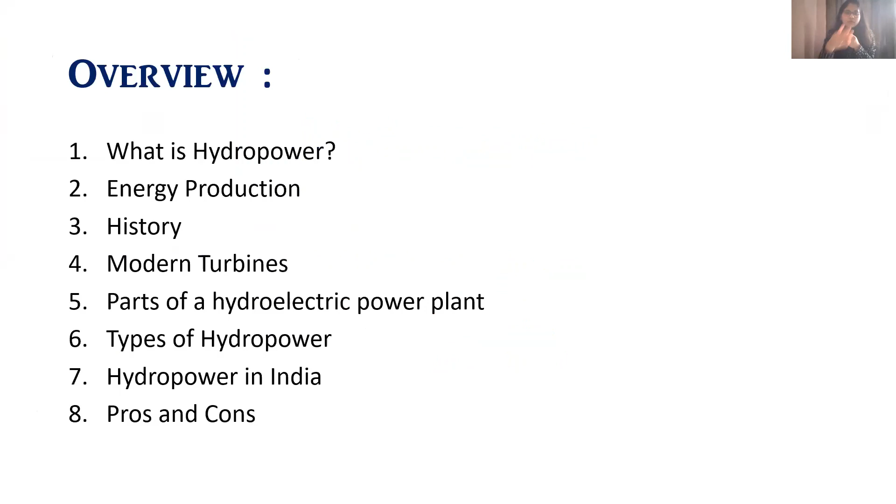One second. So this is an overview of my presentation. These are the various points that I'm going to be speaking on. Starting with what is hydropower. Hydropower is the power derived from the energy of water that falls from a height or that falls at a high speed. And this energy is harnessed for useful purposes.

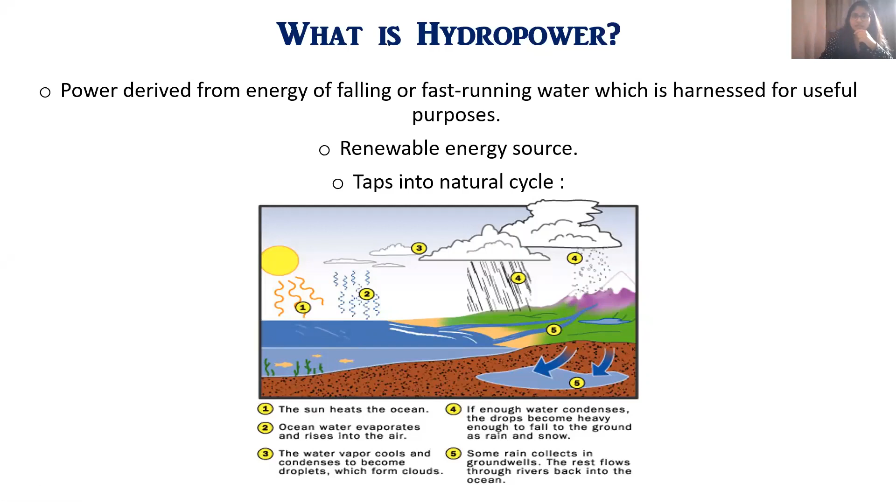So what we do in hydropower is we convert potential energy and kinetic energy of water into electrical energy. It is a renewable energy source because the water cycle is constantly renewed by the sun. The water cycle is as follows. So here we have the sunlight that's falling on the ocean. The water evaporates and the water vapor rises into the atmosphere. The water vapor here condenses and forms water droplets. The water droplets then form clouds, and when these clouds become heavy enough, the water returns back to the earth as rainfall.

So why do we need hydropower? We know that non-renewable energy resources, that is fossil fuels like natural gas, coal, etc., take millions of years to form. So naturally, the production rate is very less as compared to the rate at which we're consuming energy. We're constantly looking for renewable energy resources like hydropower, wind power, solar power. Also, burning of fossil fuels emits greenhouse gases. So hydropower has zero greenhouse gas emission.

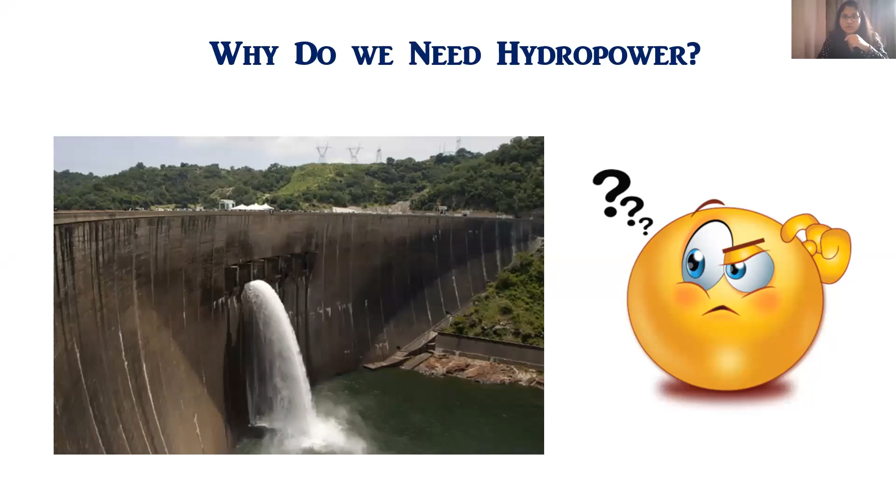In comparison with thermal power plants, hydropower plants start very quickly. Thermal power plants need 5 to 6 hours to start because we have to achieve boiler temperature and pressure. Whereas in hydropower, we just have to open the gates of the dam, allow the water to flow, which spins a turbine, which is connected to a generator, which generates electricity. Also, in comparison with wind and solar energy, which depend on weather conditions and time of the day respectively, hydropower depends only on water, which is always available. So these are the reasons why we want to improve this technology and use it further.

Let's start with the history of hydropower. So humans have been harnessing water energy for thousands of years. The first picture here is an irrigation system used in ancient Egypt. So this water lifting device was used to irrigate farming land. This was aimed to increase the area of farming land around the river Nile.

The second invention was a great invention by Archimedes called the Archimedes screw. So the Archimedes screw is encased in a hollow cylinder. A part of the screw is immersed in water, the lower portion of the screw, and this water is transported upwards by rotating this device about this axis. So this is a very useful device which was used to lift grains, it was used to clear flooded mines, and is also used for irrigation.

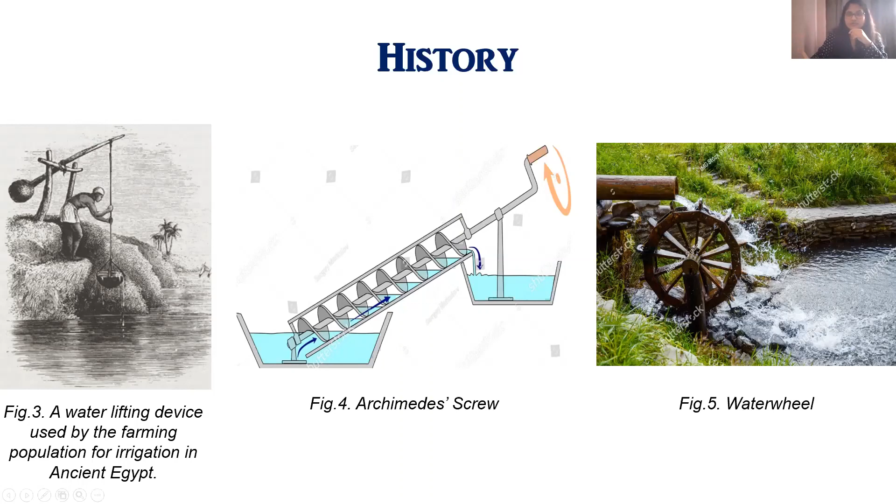Now coming to water wheels, the first people to use wheels were Greeks. They used water wheels to grind wheat into flour. Then by 1080, water wheels were used throughout Western Europe. So these are the different designs of water wheels that progressed with time. So this is the undershot wheel, the first type, in which water flows from under the wheel. This was very inefficient because the kinetic energy of water wasn't captured efficiently.

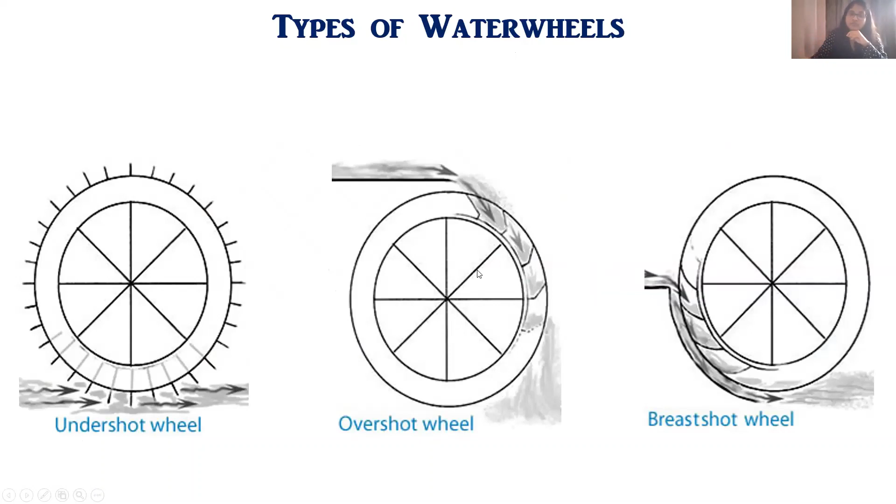With time, the designs improved and we got the overshot wheel and the breastshot wheel. So in both these wheels, we see that water is incident on the wheel from a height. And still, there were many more improvements made over the centuries to improve the efficiencies of water wheels. And finally, in 1832, the French engineer Fourneyron invented the Fourneyron turbine. So the Fourneyron turbine is a fully submerged vertical axis device. These blue things that you see here, these are the fixed vanes.

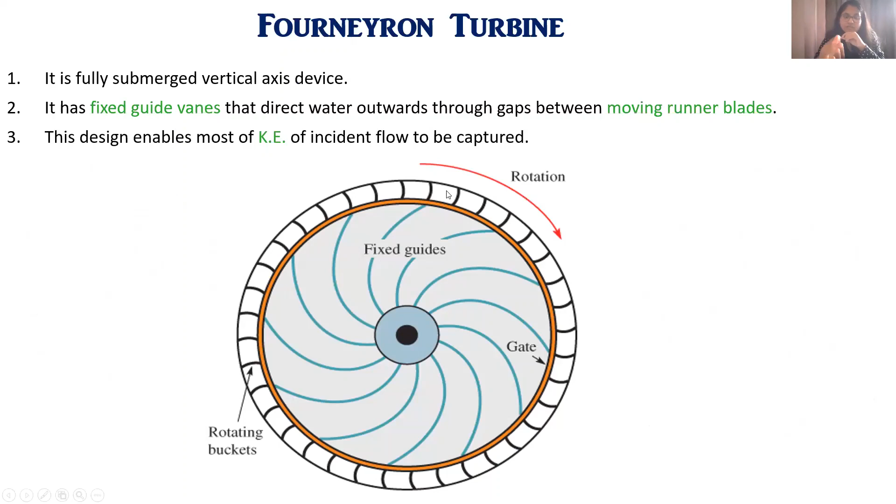These fixed vanes or guide vanes are stationary. So when water falls on the turbine, these vanes simply direct the water towards the runner blades. These white things are the runner blades or the rotating runners. So this design actually enables maximum kinetic energy of the water to be captured. So the Fourneyron turbine pioneered the development of modern water turbines.

The modern water turbines are basically of two designs, the impulse turbine and the reaction turbine. Impulse turbine uses the impulse force exerted by the water, and reaction turbine uses the reaction force exerted by the water. An example of impulse turbine is the Pelton wheel shown here. This Pelton wheel was invented by Lester Pelton in the 1870s.

So this type of water turbine is suitable when water energy is available at high head and low Q. Head is basically the vertical distance between the top of a reservoir and the turbine, and Q is the volume of water that flows per second. So let's see how this works.

So water is injected in this nozzle that you see here, and it is ejected at a very high speed. So we get a water jet, and this water jet is incident on these blades, which then rotate, like this. So with the blades, the shaft of the turbine also rotates. This shaft is then connected to a generator, which generates electricity.

So we see that the kinetic energy of the incident water is converted to the rotational energy of the blade. So basically the power output of the turbine is equal to the kinetic energy incident per second, and it is given by this formula here, half rho Q u squared, where u is the velocity of the water jet.

Okay, so the wheel has bucket shaped blades. Had the shape not been of a bucket, then the momentum of the water would not have been captured entirely. The water would have just been splashed in many directions. But this shape enables maximum momentum of the water jet to be captured, because the direction of the incident water jet and the direction of the water splashed are exactly opposite. So that is why the blades are shaped like this.

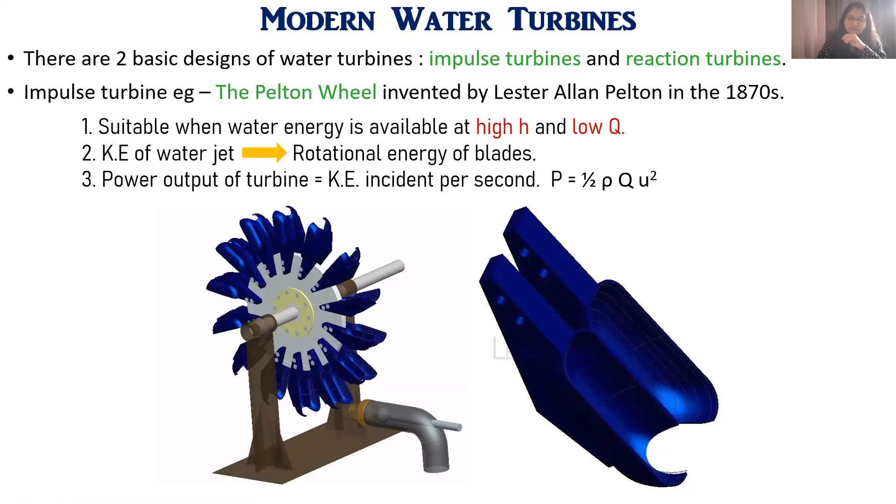Coming to the reaction turbines, there are two types of reaction turbines, Francis turbine and Kaplan turbine.

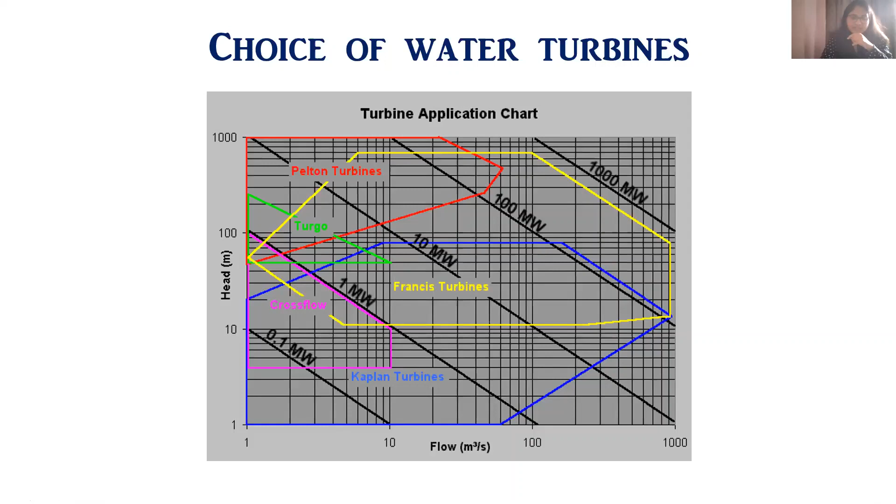Whereas the Kaplan turbine is used for low head and high Q, because when the water flow rate is high, that ensures an efficient production of reaction force. So it is used in this region. We see from this graph that the Francis turbine lies in the middle, that is medium H and medium Q, so it can be used for a wide range of applications. The only problem if we use a turbine outside its recommended operating condition is that it won't work efficiently. That's the only problem.

So, parts of a hydroelectric power plant. This is the basic layout. This is the reservoir, where water is stored. It's just a storage space, and the height of water in the reservoir determines how much potential energy the water will possess. This is the dam, which holds back the water. The dam is made of concrete, rock, stone, etc. And this is the intake. Intake is basically a composition of structures which prevents...

One second, Nishat is coming.

Okay, this intake is basically a composition of structures which prevents water logs, debris or dirt entering this place. This is the control gate, which controls the flow of water. When these gates are open, the water flows and it meets the varying power demand. This is the penstock. It's a long pipe, a large pipe actually, and here the potential energy of water is converted into kinetic energy. The penstock carries the water from the intake to the turbine.

So the water which is incident here spins this turbine. This is the shaft of the turbine. The turbine is connected to a generator. So in this whole process, the kinetic energy of water is converted to the mechanical energy of the turbine, and the mechanical energy of the turbine is converted into electrical energy. The generator works on the principle of electromagnetic induction, in which a varying magnetic field induces current in an adjacent conductor.

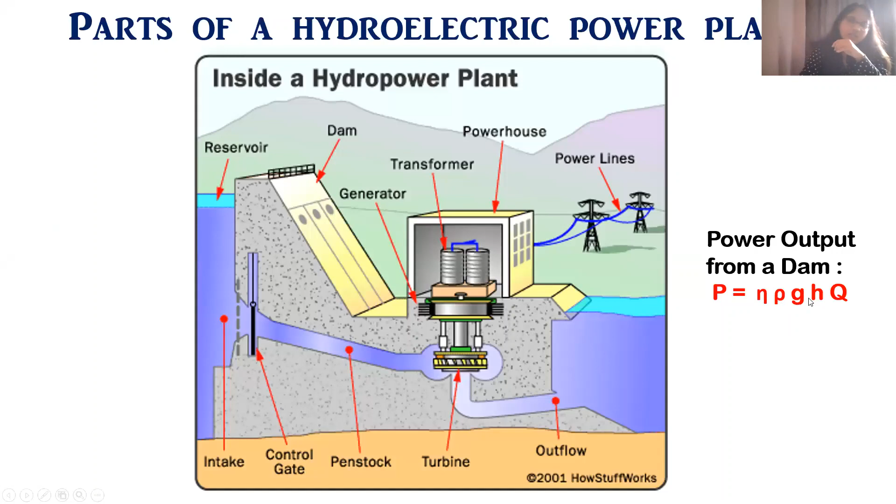Anyway, okay. So the water that flows to this outflow, it meets the water body here. The power output of a dam is P equals eta (efficiency) times rho g H Q. Types of hydropower. So these are the 4 types of hydropower that we have.

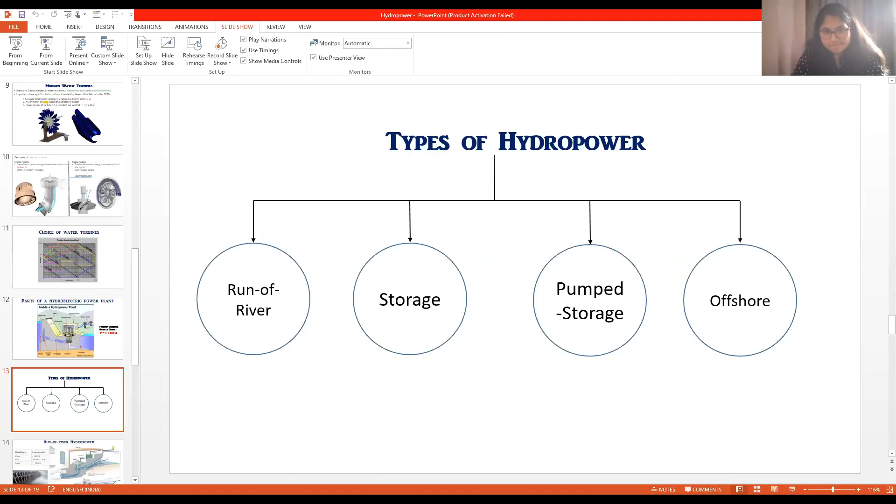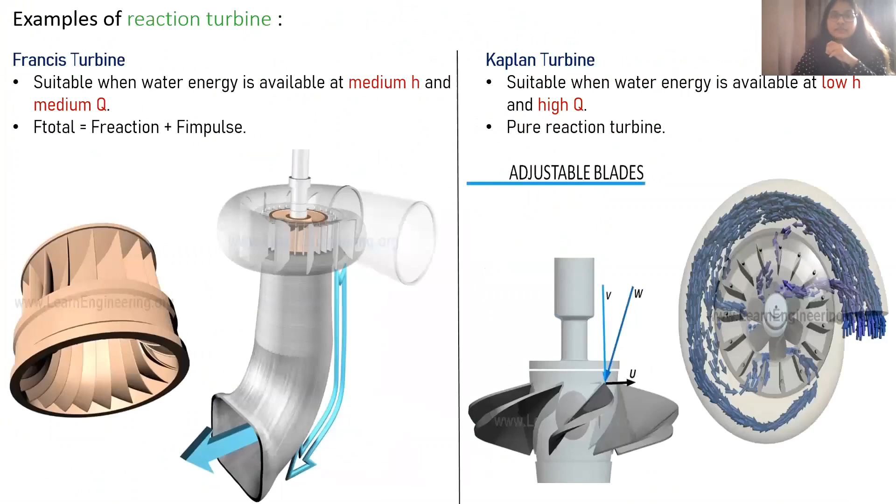Sorry. These are the 4 types of hydropower that we have: run-of-river, storage, pumped storage, and offshore. Offshore basically derives energy from tidal currents and wave energy, so we're not going to talk about that. Let's start with run-of-river. In run-of-river hydropower, this is classified into 3 types: micro hydropower, mini hydropower, and small hydropower. This is the corresponding power capacity of each of these.

So in run-of-river, we don't have a reservoir. We basically divert a part of the naturally flowing river. This is the naturally flowing river. We divert a part of it and make it flow over this weir, which is not a dam, it is just a small construction. And then it passes to spin a turbine and it produces electricity. So this weir basically has control gates, which control the water level and flow rate.

Suppose the weir is somewhere here. The weir also isolates the turbine in case of an emergency or some renovation. And the weir also produces a small storage of water called the pondage in case the flow rate of the river is low, so it will use that stored water to produce electricity.

So from the weir, the water flows through this penstock. It spins this Kaplan turbine. This Kaplan turbine's shaft is here, the generator is here, and it generates electricity. The remaining water is fed back to the river. Here also we have some gates to prevent dirt or big obstacles from the flowing river from entering the turbine. So this is the basic working of run-of-river hydropower.

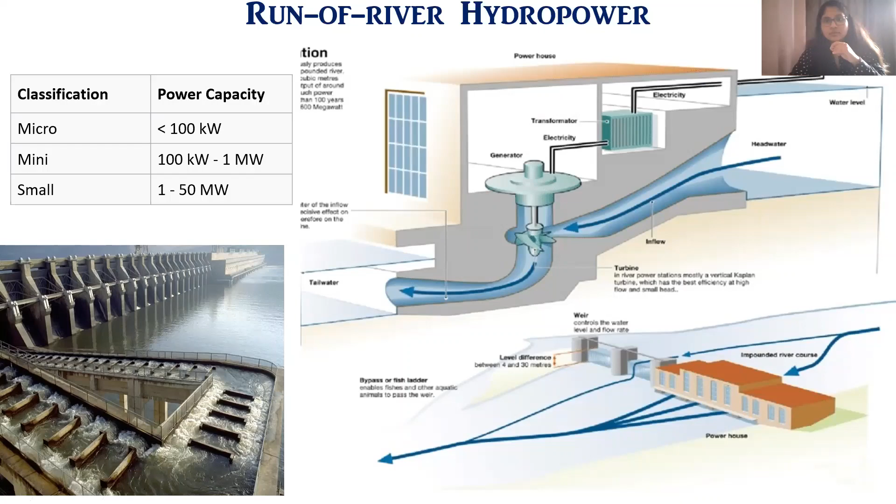So run-of-river is basically used to meet our base load demand, and it is a single-purpose hydroelectric power plant, meaning it only produces electricity. Storage hydropower is a large-scale hydropower plant that has a power capacity of over 100 megawatts. It works as follows. Similarly, as I showed in the previous slide, this is a reservoir. Water flows through this penstock, spins the turbine, which is connected to the generator, which generates electricity.

Now this storage hydropower is also called a multi-purpose hydroelectric power plant, because this dam can be used for many purposes: irrigation, water storage, water supply, navigation, and also recreational purposes like boating. This is used to meet the peak load and base load, and the turbine used, since it is high H and low Q, is the Francis turbine, since it comes in both regions, or better, the Pelton turbine.

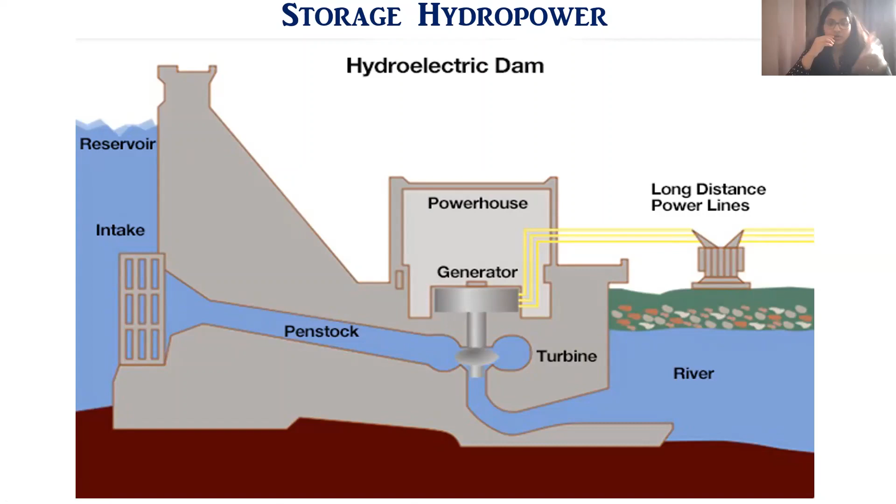Pumped storage hydropower. This type of hydropower is mostly used in those countries where water resources are not abundant. Pumped storage hydropower basically assists renewable energy sources like wind, solar, or thermal. It basically acts like a battery that stores electricity produced from renewable energy sources, and it can use this electricity again when the power demand is high.

So it works as follows. It has, as you can see, this upper storage and lower storage. This pumped storage hydropower stores and captures water in the upper reservoir and lower reservoir, and there's a steep drop between these two reservoirs.

Suppose it's a sunny day, or the wind is blowing fast, then we have a surplus of power, and suppose at that time the power demand is quite low. So we use that surplus power in the form of electricity to pump water from the lower reservoir to the upper reservoir, and we store water here.

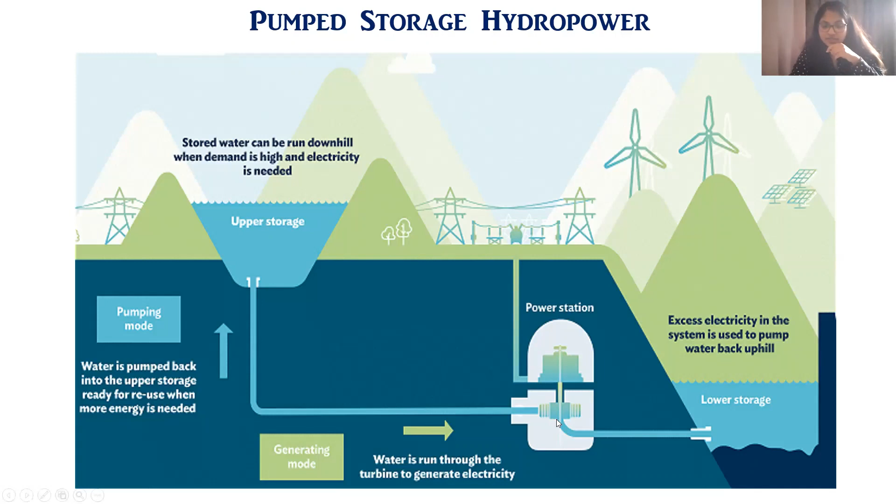Now suppose the demand is high and the renewable energy sources like wind and solar are not able to meet this. In those cases, we use this as a backup. We release the water in the upper reservoir to the lower reservoir, which spins the turbine, and we get electricity. This entire system, working in coordination with other energy sources, is very stable, very reliable, and very clean. That is the advantage of using pumped storage hydropower. The turbine used here is a Pelton or a Francis turbine.

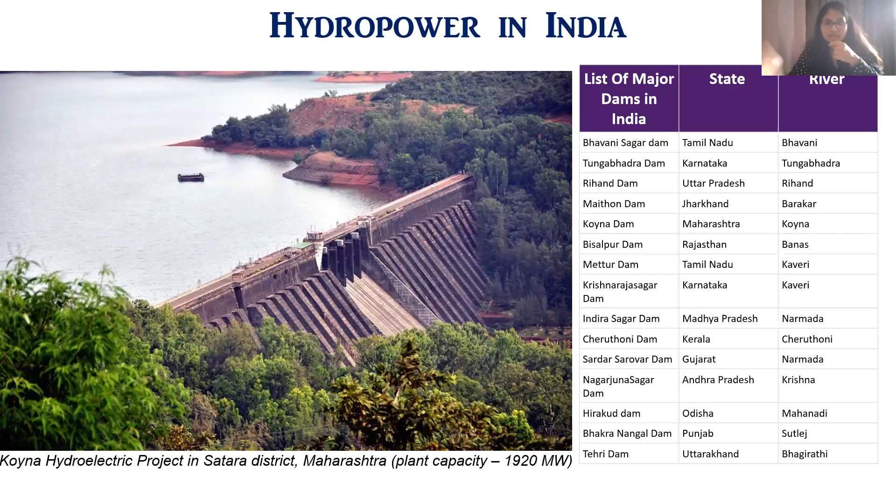Advantages and disadvantages of hydropower. These are the various advantages of hydropower. First of all, it does not produce greenhouse gases, it has quick starting, low operational costs, multi-purpose dams, and it can effectively make supply meet demand. And it has a long plant life, 40 years or more, before any major renovation.

A disadvantage is that when selecting a site for a hydroelectric power plant, we require that the water quantity is sufficient. The water head should be high enough so that we can effectively harness the energy of water. There should be an optimum average rainfall in that area, and the distance of the area from the load center shouldn't be too big. Therefore, there are a limited number of potential plant sites, keeping all of these factors in mind.

Also, construction of the dam is very expensive, so the investment is huge and the payback period is very long. The money comes back very late. It also affects water quality, and when we create a reservoir, we displace people. Worldwide, 30 to 60 million people have been displaced to construct hydroelectric power plants, and all the vegetation gets submerged. Also, in case of a dam collapse, due either to defects in the dam or to water overspilling the dam, flooding takes place, which is very dangerous. So these are the various disadvantages.

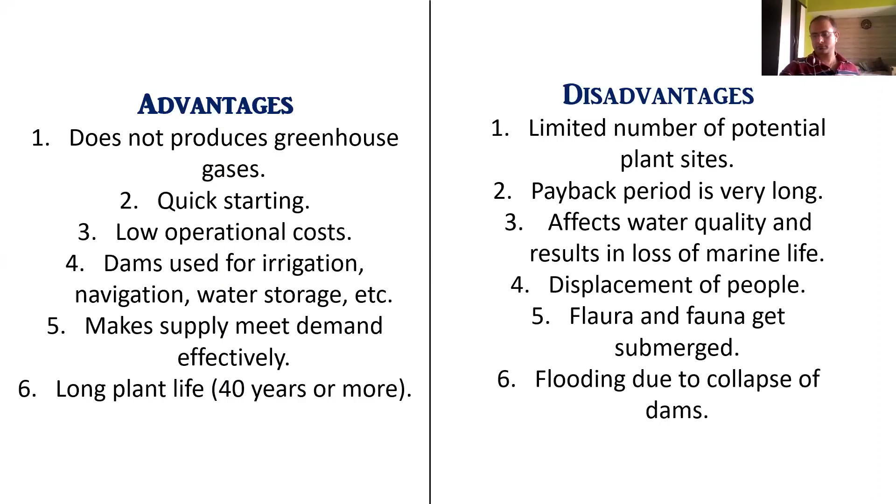So although there's an increase in global energy demand, the growth of hydropower is limited because of all of these factors, and also because markets only invest in power plants which are not very capital intensive and which give returns very fast. So mostly these hydroelectric power plants are government funded, and they are mostly in areas where water resources are abundant and construction cost is low.